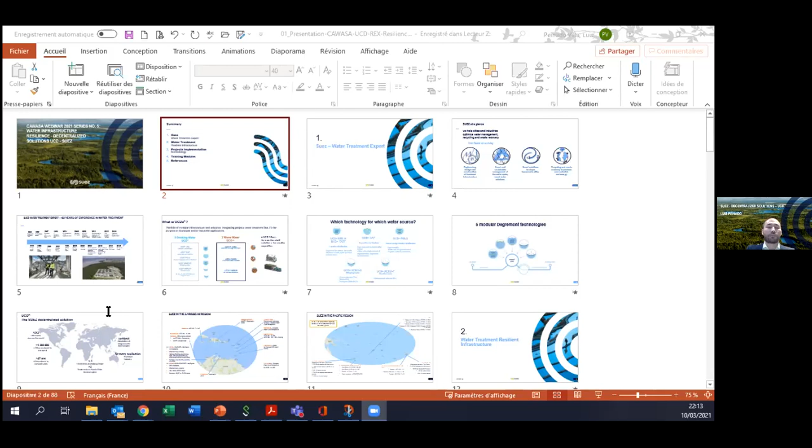And we're going to be able to discuss questions, comments, and remarks from all of you at the end of the session, or even if you have comments through the presentation, don't hesitate. So I won't get too long through these, I'm just going to put it in presentation mode.

Our four main activities: the first is Degremont, where we're very well known worldwide. We engineer, design, and construct water infrastructure and waste infrastructure as well. Our second pillar is the management of resources, water and waste, so we are operators as well as contractors for water infrastructure. The third pillar is smart solutions, mainly everything to do with digital technologies that have been shaping this sector for the last 15 years. And then we have the waste sector, especially in recycling and recovery to produce new materials and energy.

So we're going to be discussing this evening our business line, which is Decentralized Solutions, a branch of the engineering and construction activity.

Next, this timeline shows first this branch, Degremont, which became in 2015 a unique name, Suez, as all the branches of the group became Suez. Degremont is very well known; I think many of us and many water professionals have learned many processes through Degremont's Memento, very well known worldwide. This timeline shows just one of the main milestones in terms of water treatment references since the creation of the company up to now.

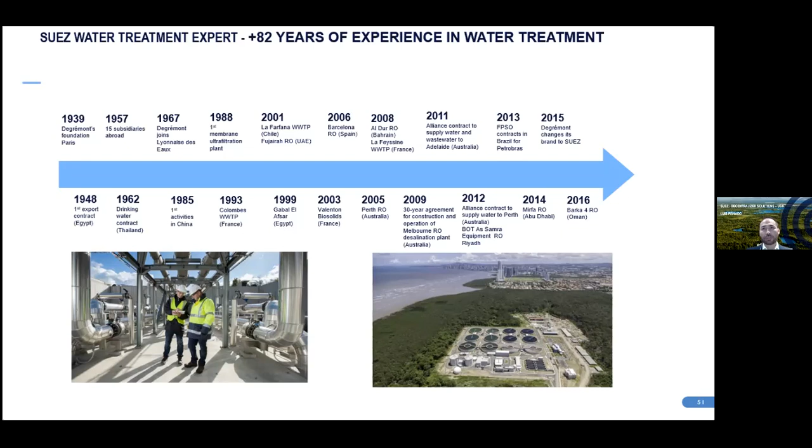And then right now we're in a different way, which is how can we get quality water and services to the rural and peri-urban areas. That's the difficult part of our sector.

From this treatment line, what we've been doing in this service for the last 27 years is taking those treatment lines and putting them into modular systems that allow cities and municipalities to deliver essential services, not only in terms of quantity but in quality as well, delivering water quality and wastewater treatment 24/7.

We have 5 different water treatment technologies. I won't get through all of them. The first, which we have most deployed, is lamellar clarification, and that's the one we're going to discuss a little bit later. Then we have 3 wastewater technologies that we see in the center - it's not the topic of this webinar. And then we have small technologies that are a hybrid from the drinking water technologies, much more compact and simpler to deploy.

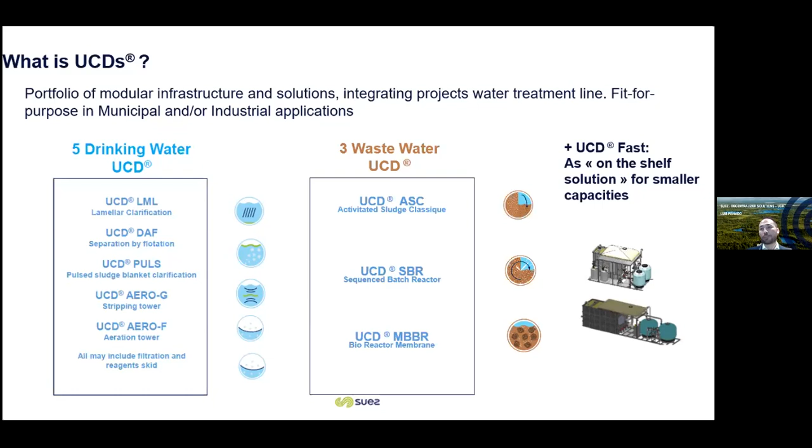So we're going to concentrate on the first one, the lamellar clarification, which is one of the technologies that many of you have deployed in your territories - operating flocculation, coagulation, settling, and filtration. That's the reason why we're going to discuss this one.

Then we have DAF, which is separation, but this time by flotation. Instead of settling, we're going to have a flotation stage, and then we're going to filtrate. But once again, it's not the topic of this webinar.

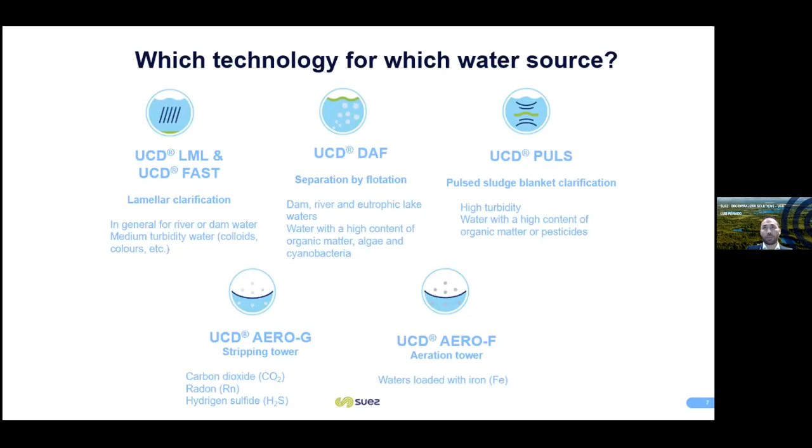And then we have pulsation and underground water treatment lines that we could discuss at the end of the webinar if you would like to.

As I was saying, the main complexity as operators is: we collect raw water, we treat it, and then we distribute it to our clients. But what about those communities that are out of reach of the network? So our model is to think in the easiest, most competitive way to install that capacity as a decentralized solution.

We're taking conventional treatment lines to the reach of those populations with networks that can be between 15 to 50 or 60 kilometers. So we're talking about mini grids to allow these populations to have access to water and wastewater services.

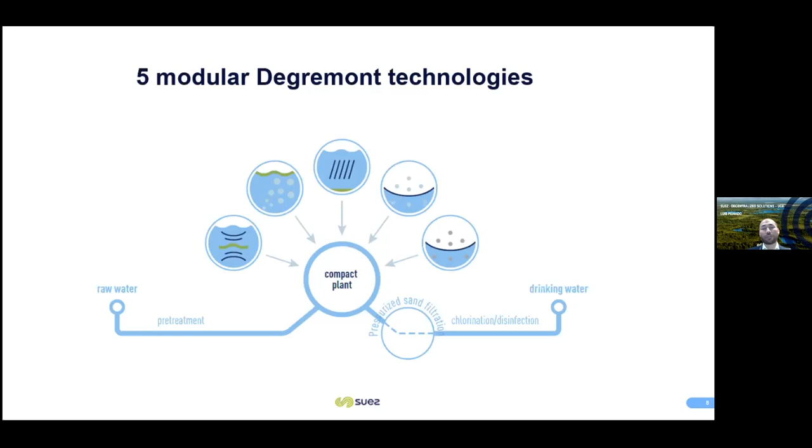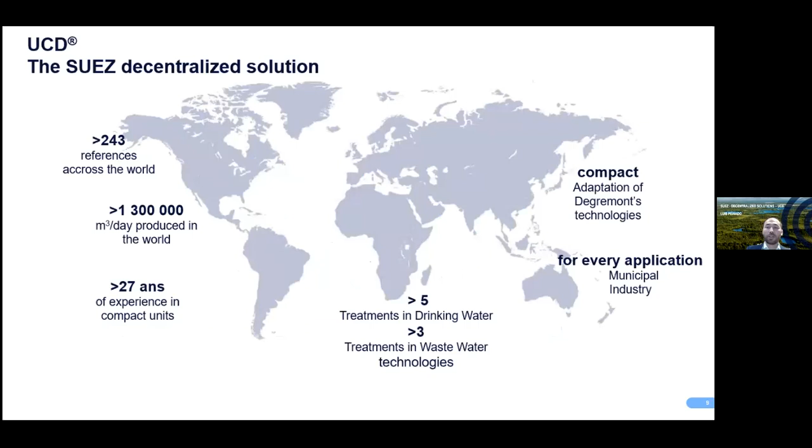In terms of references, as I was saying, we have more than 240 references around the world. In installed capacity, we produce across all our references more than 1,300,000 cubic meters per day. And we have applications, as I was saying, in municipal and industry sectors.

In the Caribbean, we're very present historically. I won't get through all of them, but one of the main points is to point out that we understand your work, because we can be operators ourselves, for example in Colombia, in two cities - like Cartagena, which is a city of 1 million inhabitants. We've been present since '95, and we've improved the key performance indicators, as you can see on the slide.

And there's another city since 2012 that we've been working with in the west part of Colombia, improving as well the key indicators of the service. And then we have other operators like Martinique, Guadeloupe, and French Guiana - because of French origins, it's a reachable market for our company.

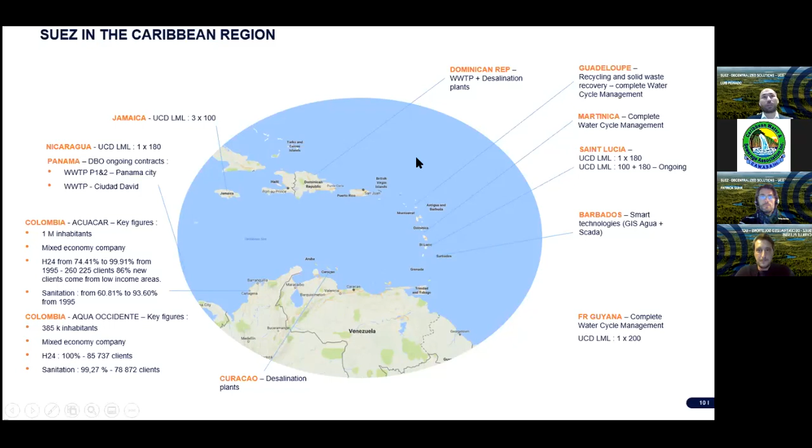And then we have other references all around the world. Right now, we're very active in Panama with important infrastructure contracts. The rest, where you see UCDs, are decentralized infrastructure that we've been deploying over the last 10, 15 years - and some references in desalination.

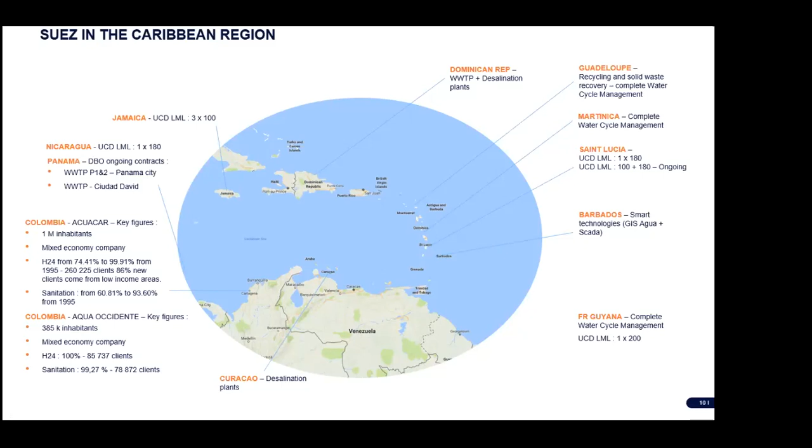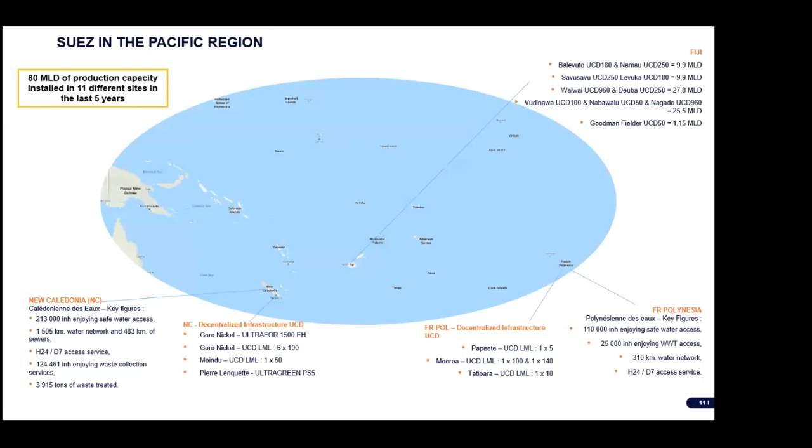This is not an extensive map, but you can see that we cover almost all the geographies in the Caribbean. And then in the Pacific it's a much bigger area in terms of insularity, let's say, from Papua New Guinea up to French Polynesia - taking into account our activities in Australia and New Zealand. We're very present in New Caledonia, where we're operators as well as in French Polynesia.

Our operators use our technology. So you can see in New Caledonia we have different references for industrial clients, for example Goro Nickel and others. In French Polynesia, they're much more municipal references.

And then in Fiji, which is quite a successful story for the national operator and us, we've been deploying more than 80 MLD in the last 5 years across 11 different sites that you can see on the right, and we still have projects ongoing.

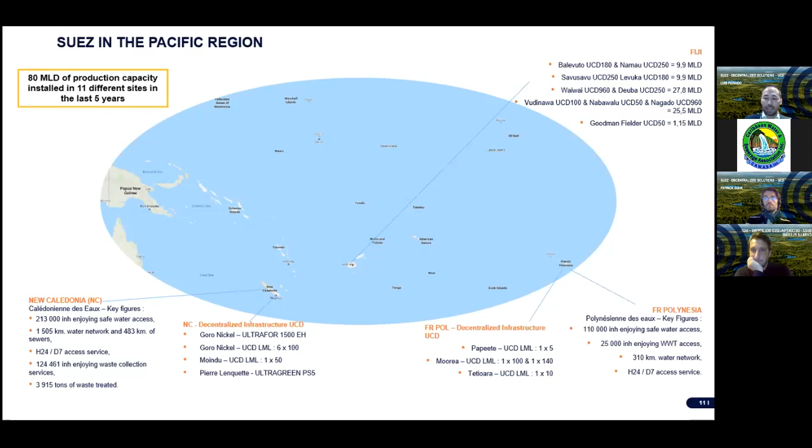So what I'm going to share right now, we're going to begin with this water treatment resilient infrastructure. It's a short video - if you have any issue with the sound, just let me know. I'm just going to put it here.

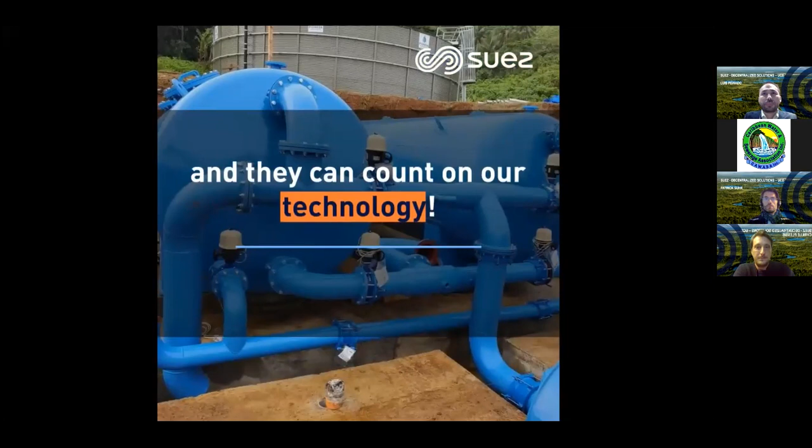Being the strongest, we've seen that the infrastructure, especially the portal frame housing and the treatment plant itself, withstands a Category 5 tropical cyclone.

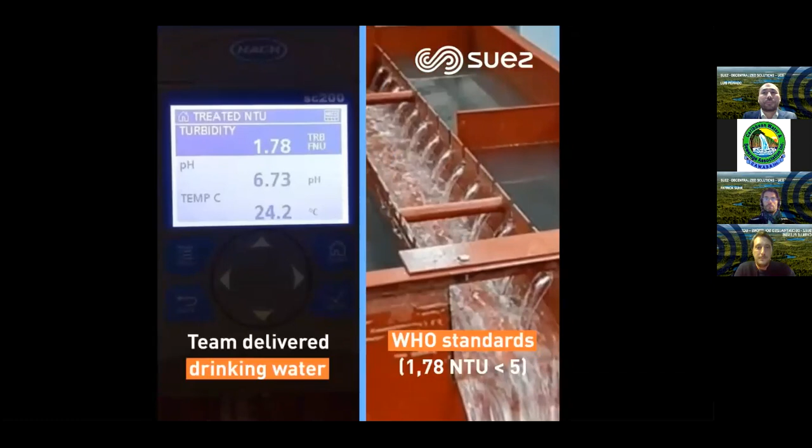To produce drinking water which is in compliance with the Fiji National Drinking Water Quality Standards for both of the package plants, Deuba and Namau.

So Patrick, the ground is yours. Thank you, Luis. So we're going through some slides where I'm going to present you on which basis we are doing water treatment on our package plants.

So the treatment is a conventional and robust conventional treatment, which is based on coagulation and then flocculation in a tank with mixer, and there is a pH corrector.

Luis, we have, yes. So once we have the right flocculation for the suspended solid, we are able to carry it into a lamellar settling tank.

After that, it's possible to readjust the pH before going through sand filters in order to get a very low turbidity for treated water before water is disinfected, before water supply to the population.

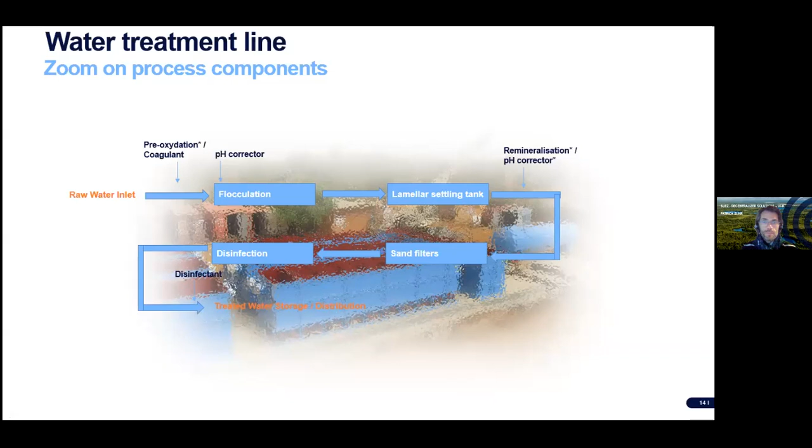Okay, next, Luis, if you can go. Yes, so here one important thing is reagent injection. In our standard, we are giving to our client all tools necessary to do this treatment and this reagent injection, which are prepared in tanks where some mixers make possible the preparation of a reagent solution.

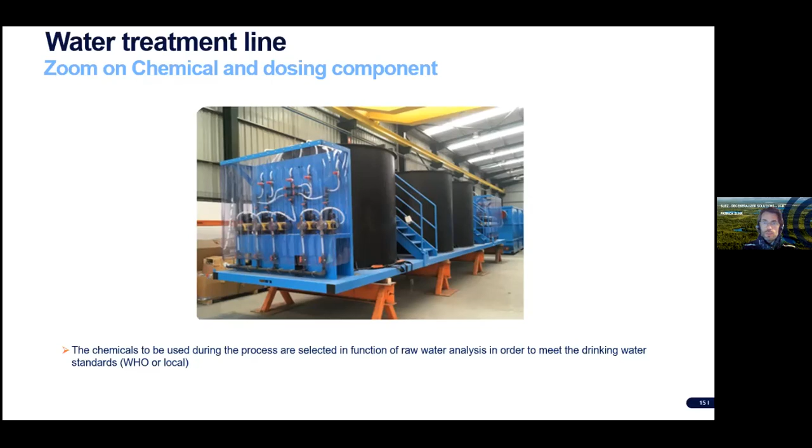So once you get the solution, the reagent is injected at the right flow rate thanks to metering pumps. You can see on the picture. Okay, thanks to that, we can reach the international standard for water quality.

So here, a small focus on the flocculation, which is taking place in tanks, as I told you, with mixers. So once coagulant and lime is added in order to get the right coagulation and the right flocculation, we have there a retention time which is adapted to all types of water.

And especially there are very good results on tropical water, which we can find in your areas. So the retention time is in the range of 14 to 16 minutes. It's the addition of the volume V1, V2, and V3 you can see here.

Then after flocculation, there are some sludge pits, and some sludge extraction valves you can see at the bottom. And the water clarifying is going through the lamella you can see at the top. Okay, next, please.

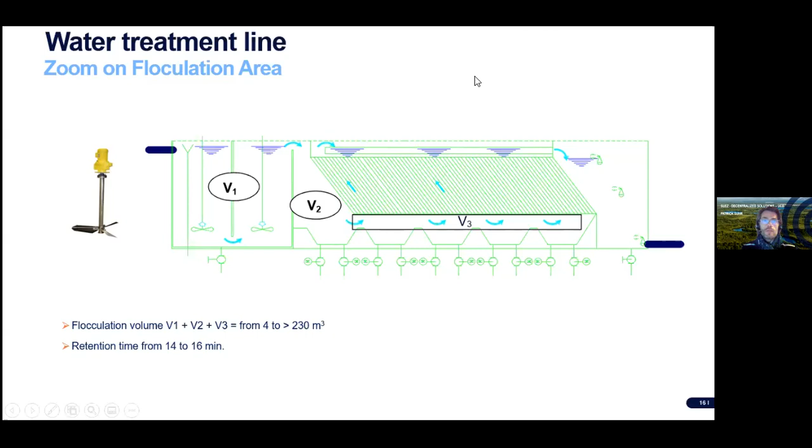So here again a small focus on some parts of our settling tanks. At the bottom, sludge extraction valve with a good diameter of 65 millimeters. So it's adapted to avoid any clogging.

On the top right, you can see some lamella modules, which are of high efficiency. And then some launders, which collect the clarified water at the top of the settling tanks with good gathering and no excess velocities.

Okay, so the figures you can see, thanks to the lamella settling, we can offer a very important settling area, because of a ratio of about 20 between the surface of the settling tanks and the surface of settling as a projected surface.

That means we have a footprint which is 20 times smaller than a clarifier without these settling modules. And thanks to that, we have a Hazen velocity of around 0.7 meter per hour, which gives very good results for clarified water quality. Thank you. Next.

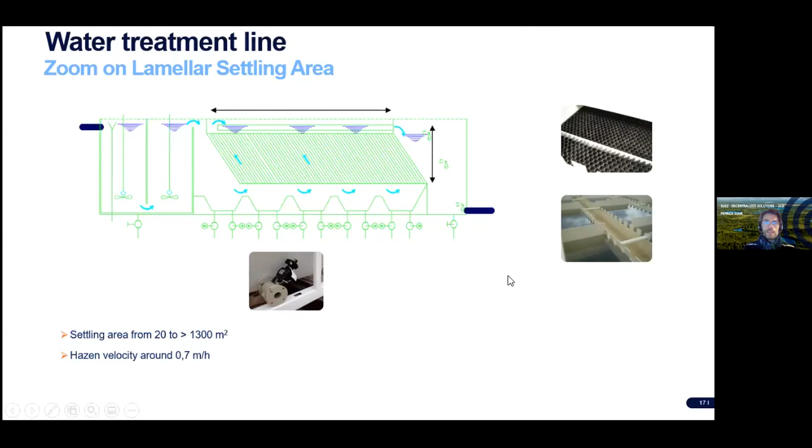Okay, so the final step of our treatment before disinfection is sand filtration, thanks to pressure sand filters. So in these filters you have a floor with nozzles, high density of nozzles, on which we put around 1 meter of sand height in order to do the final filtration.

In our standard, all filters are at least two, one filter beside the other. Why two? Because in order to be as small as possible, our package plants use some filtered water from one filter to backwash the other one. Thanks to that, you can have a very small footprint and no need of wash water reservoir or dedicated wash water pumps.

So here you can see for our compact units, we can have up to 80 square meters of filtration floor, and the average filtration velocity we can offer is between 7 and 10 meters per hour. With these figures, you get very good quality, and you can get less than 1 NTU easily on the treated water. At the bottom right, you can see the pipes, valves, and blowers which make possible the backwash of the filters one after the other.

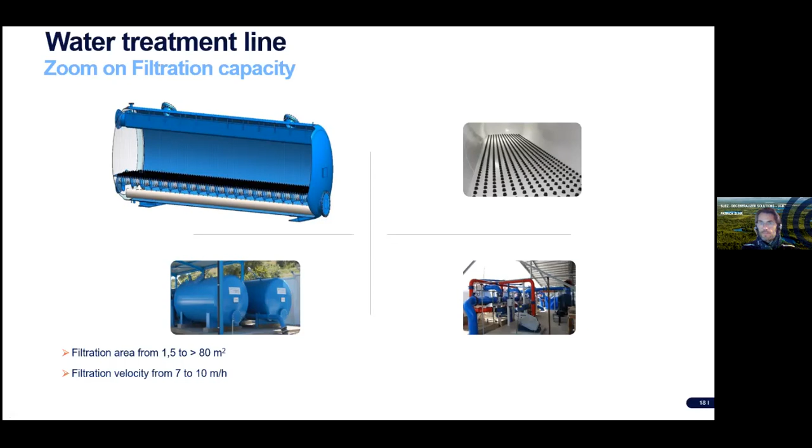Thank you, next. Here we have a quick look at what is on the HMI. That means how to manage your package plant thanks to a touch screen. So you have the main parameters, and thanks to several screens, you can go to each treatment step and make sure that the parameter and status of the plant is okay.

And here you can get some information about filter clogging, about flow rates, about the status, if this equipment is running or if there is an alarm on a special parameter. You can also have all information about the analyzer, which can give you...

At every moment you can have a look at what is the quality of inlet and outlet water. You can also choose to run in automatic mode or to do some manual operating thanks to this touchscreen.

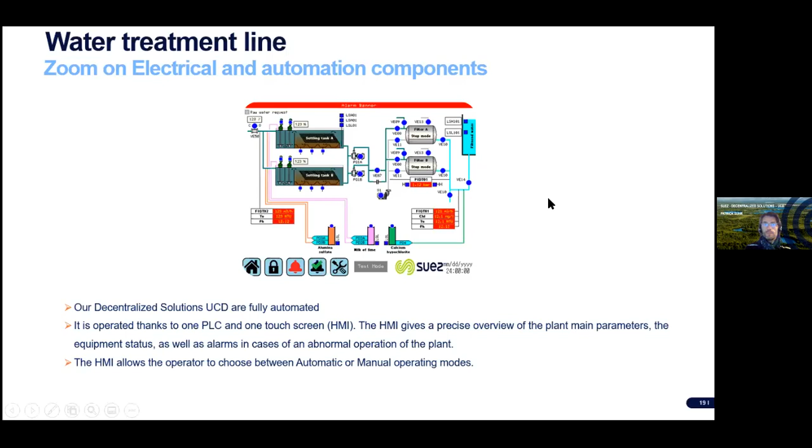So, we moved to the project's implementation. Here we are going to show you how our projects are implemented, from the day when you got an order from our client, and when we have answered a bidding from our client.

So here we have the example of a package plant we built in a very short time of less than 1 year in Bamako, which is the capital of Mali. Here you can see the result of what was implemented in less than 1 year: the treatment plant, some storage tanks, and some pumps in order to feed the network. We also had enough time to build the raw water pumping station you can see at the top of the picture.

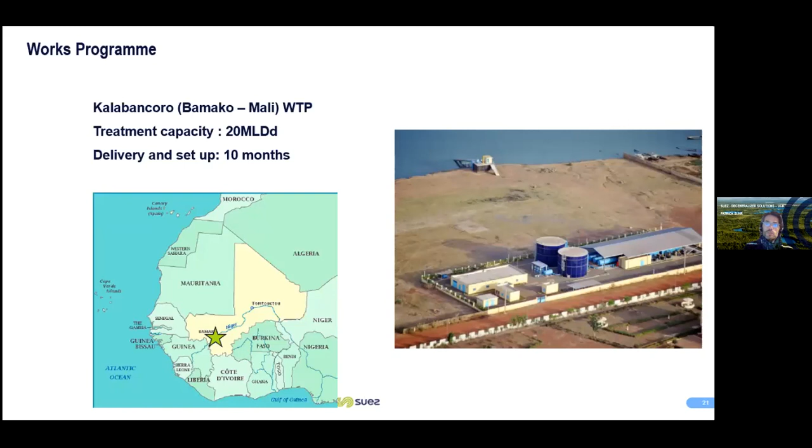So it's a very, very fast technology. And how does it work? There is a study period which takes place at the beginning of the contract.

During this study period, we do all that's necessary to manufacture the plant adapted to the client's needs, and we also study the civil works drawings so the client is able to do the civil works.

During the manufacturing period, which lasts about 4 months, thanks to a network of boilermakers located in Europe, some in France, some in Portugal, some in Greece, we are able within 4 months to build all the steel tanks, all the steel filters, and the pipings, which will be erected in a third phase.

So before erection, there is transportation. All our tanks and filters are designed to be shipped by container. You can see some pictures where the tank is well designed to fit inside the container. Once in the container, after one month for example, they are shipped by sea freight to the final destination, where they can be handled through crane.

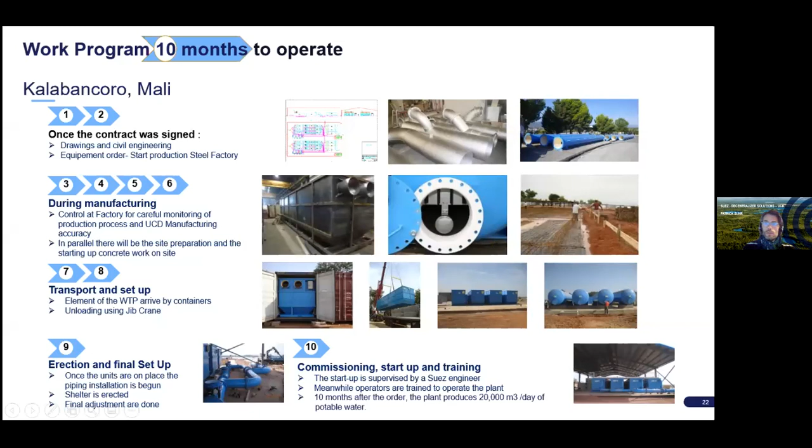Here you can see some pictures now of what is happening on site. The client is doing the concrete civil work. You can see the concrete slab with some gutters dedicated to the sludge collection and to the wash water collection, and also the drainage.

What is also done is the electrical cables are distributed within this concrete slab, thanks to electrical sheaths.

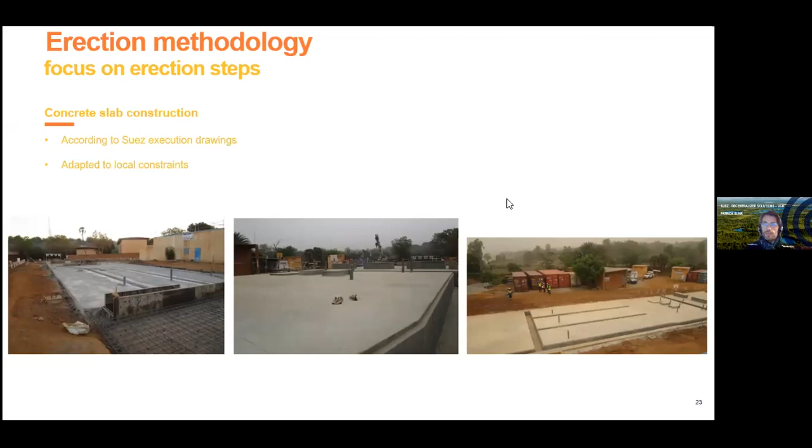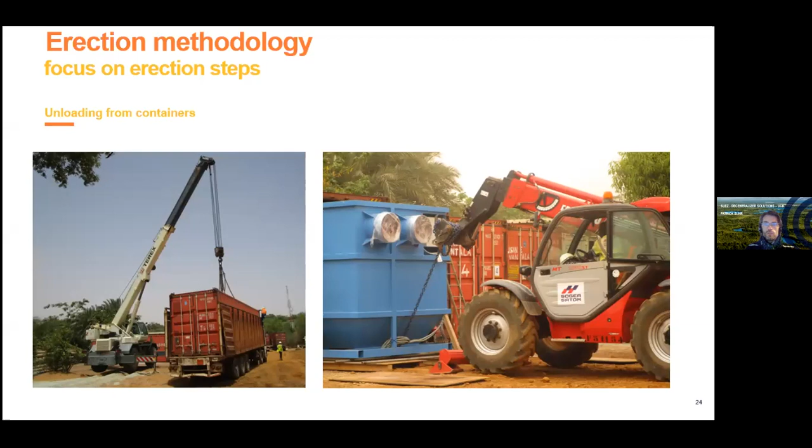Here you can see several steps of erection. So very few people are necessary.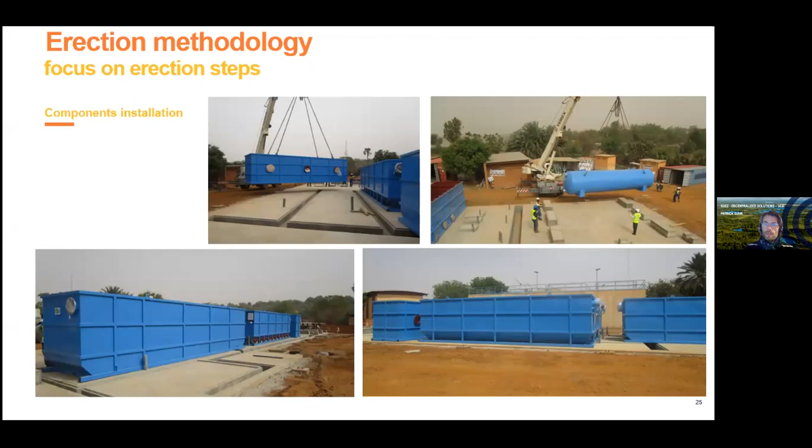Here for piping, the work is done by workers with some light handling tools, and these pipes are all connected thanks to the flanges, bolts, and supports we supply - everything necessary to do the connection and have a complete treatment plant.

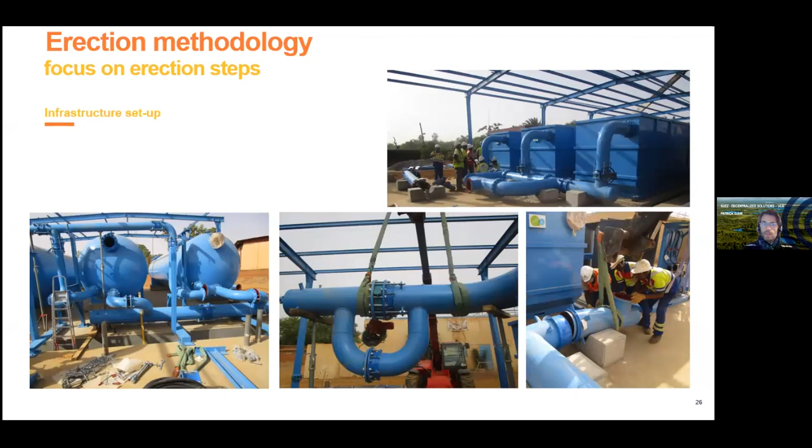And that's all. At the end, the client erects a roof, usually above the package plant, and that gives very good conditions for operators to operate our plants, and for our plants to last a very long time - that means decades, tens of years.

Maybe a last detail: in order to resist tropical conditions with high humidity, all our motors are designed for these tropical conditions, and are equipped with anti-condensation heaters and everything necessary to work in these severe conditions. Thanks to that, we have very good feedback and very few breakdowns because it is protected from these severe conditions.

Good. Thanks, Patrick. So now moving to the training modules.

All our installations and solutions are delivered with their own customized O&M manuals. You can see some on the screen that provide how the water treatment plants are or need to be operated. Normally we also bring at least some technical assistance remotely, depending on the contractual form that's been agreed. Just to let you know, we have all those documents complete with every solution.

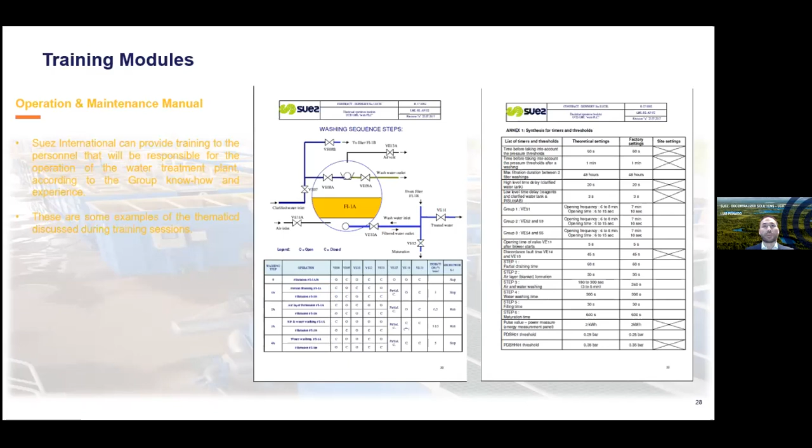And then we developed, a couple of years ago, some training on demand with 4 modules. The first one is the fundamentals of water treatment, because many operators sometimes don't have internal training. We developed this for an operator who is actually an industrial but has his own team operating the water treatment capacity, and asked us to improve the operators' and technicians' skills on water treatment.

So we prepared these modules. The second one is the principle of water treatment - water chemistry, types of pumping, and the water treatment line that Patrick just detailed.

Then the fundamentals of operation and maintenance - different equipment, protection equipment, different types of risks, chemicals, electrical, mechanical, etc. And the last one, O&M of water treatment plants, covers different preconizations for pumpings, processes, automation, alarms, and water analysis.

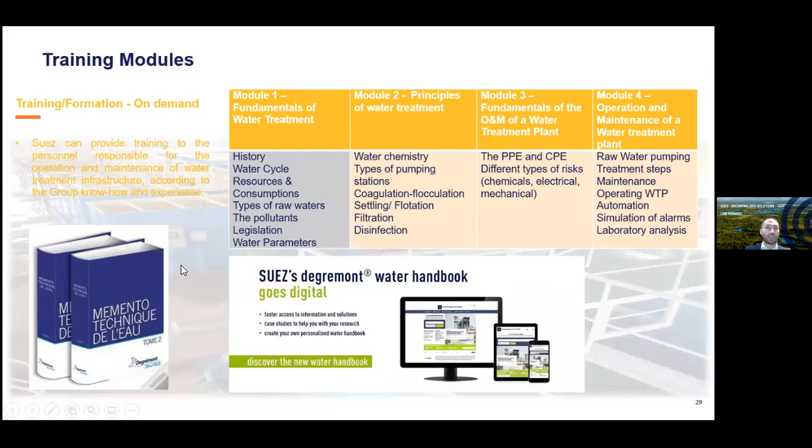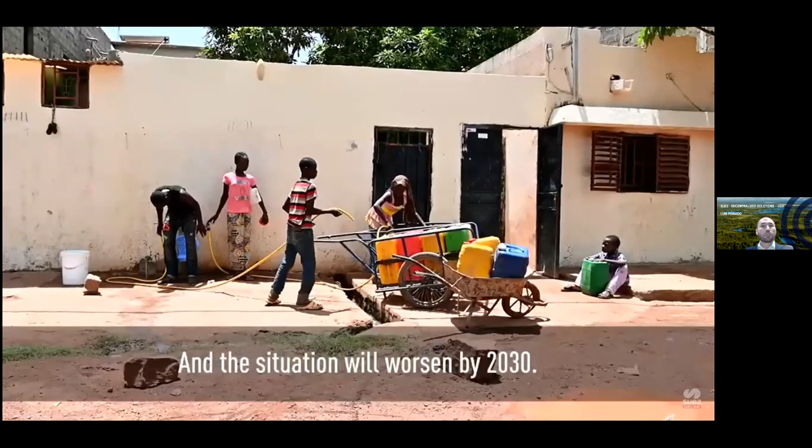Today, 2.1 billion people still do not have access to safe drinking water, and the situation will worsen by 2030. There will be 8.5 billion people on Earth, and the consequences of global warming will multiply and lead to water stress, water shortages, and extreme natural events.

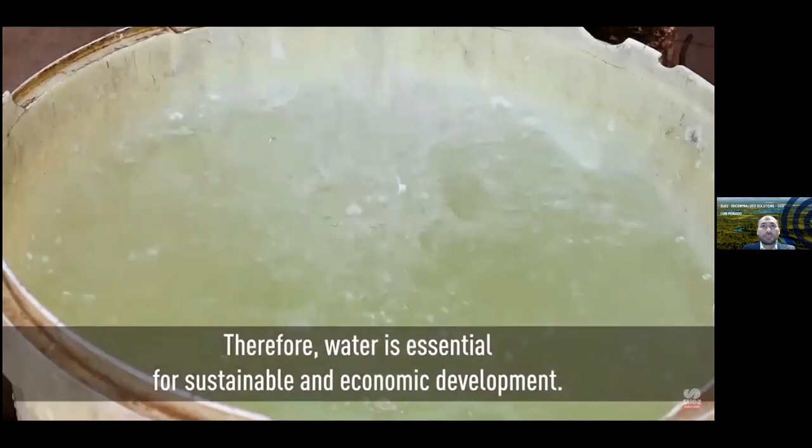Water is essential for sustainable and economic development. Without water and sanitation, people face nutrition, hygiene, and health issues.

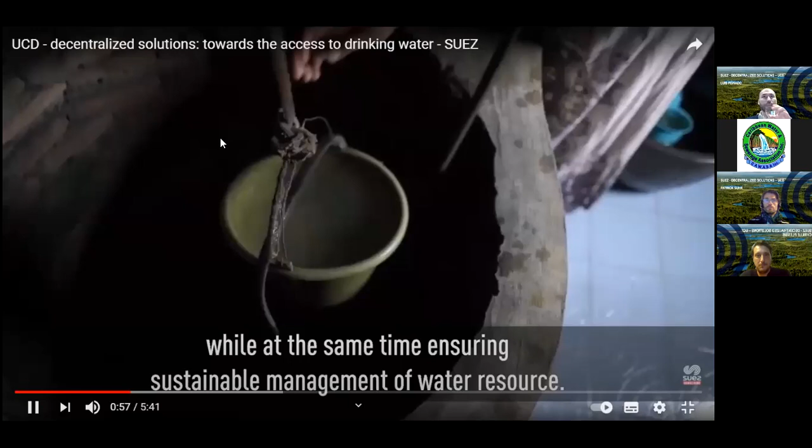One of the United Nations goals is to ensure access to water and sanitation for all by 2030, while at the same time ensuring sustainable management of water resources. Suez contributes to achieving these goals.

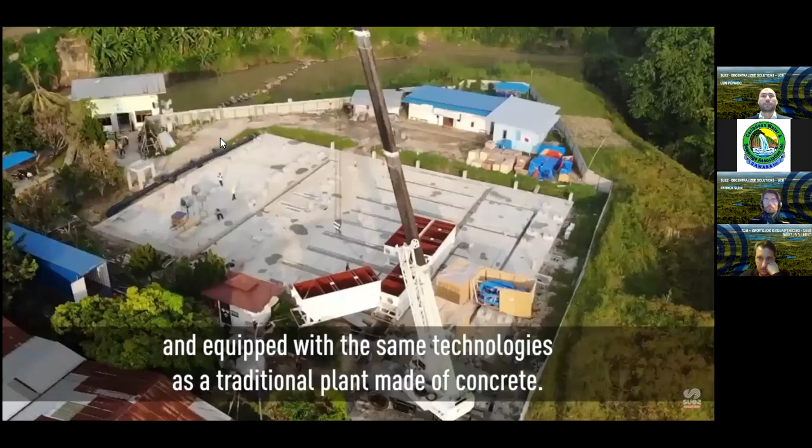The group offers decentralized solutions such as UCDs, compact drinking water production plants, prefabricated in metal containers and equipped with the same technologies as a traditional plant made of concrete. These UCDs are intended for isolated populations, megalopolis neighborhoods experiencing rapid urban growth, and in case of natural disasters.

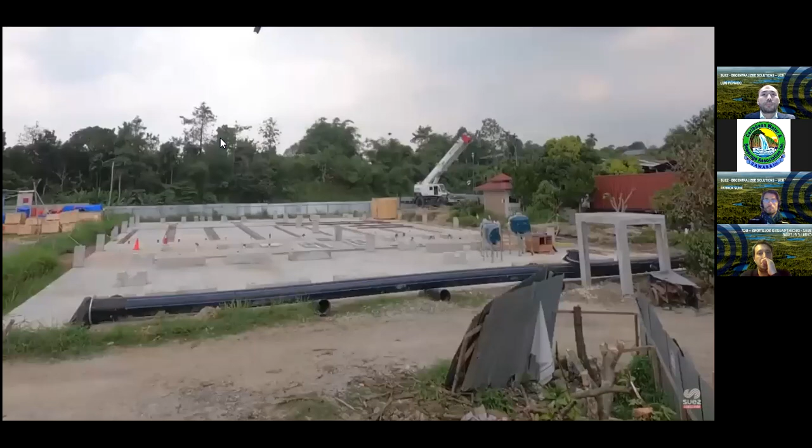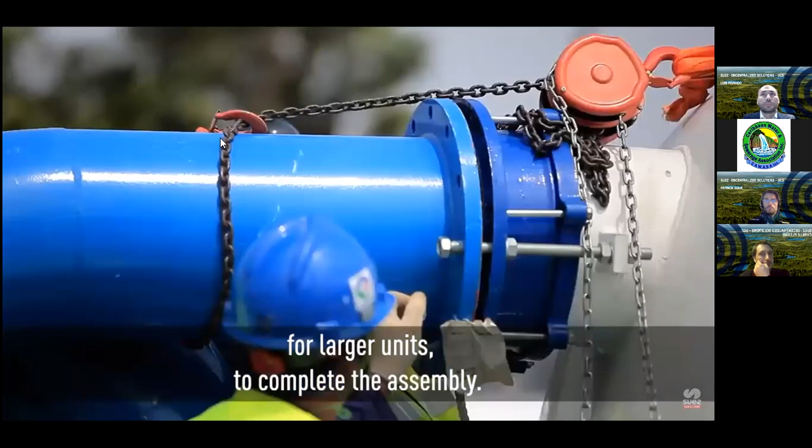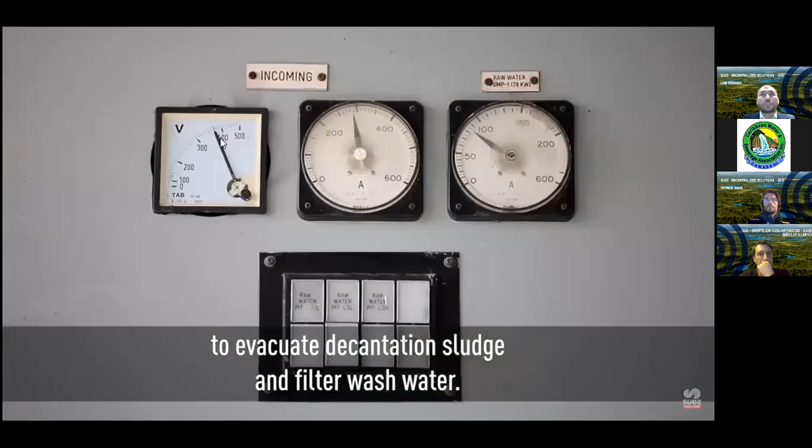The assembly of a UCD plant is much faster than for a concrete plant. It only takes a few days or a few weeks for larger units to complete the assembly. Very easy to deploy, this solution is installed on a concrete slab where a connection to the sewer is provided to evacuate decantation sludge and filter wash water.

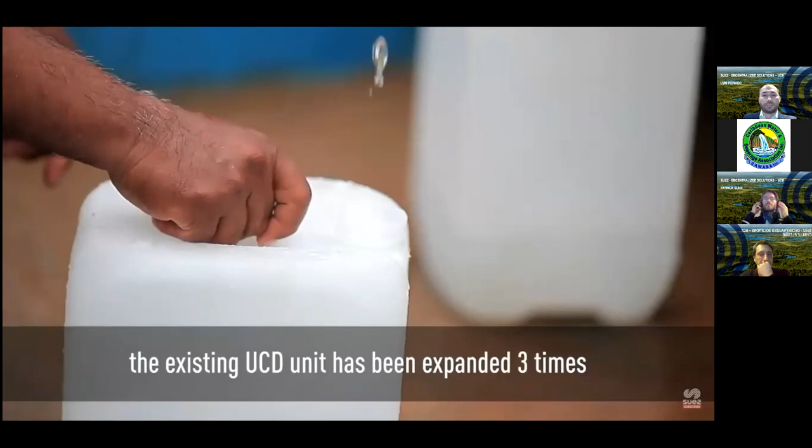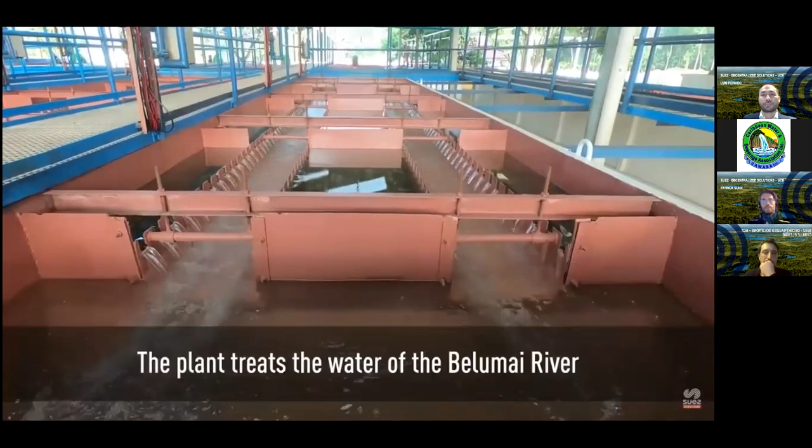In the case of Medan in Indonesia, due to the exponential growth of the city and the number of consumers, the existing UCD unit has been expanded 3 times, from an initial flow of 16 million litres per day to almost 75 million litres over a period of 15 years. The plant treats the water of the Belumai River and makes it drinkable to supply part of the 2 million inhabitants of Medan with water.

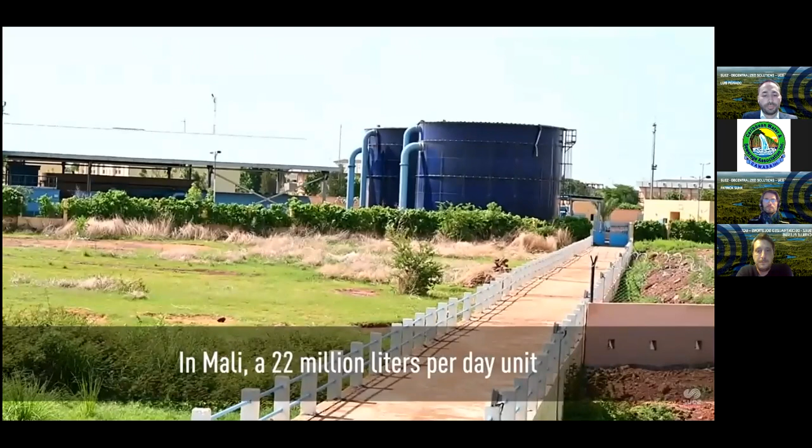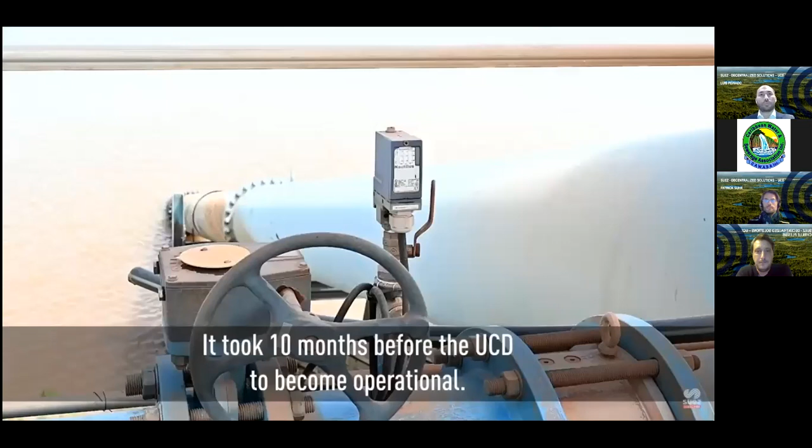In Mali, a 22 million litre per day unit has been installed to provide drinking water to the population of Bamako, while a larger plant is being built. It took 10 months before the UCD became operational. The station will continue to operate in addition to the Kalabankoro plant, which was inaugurated in June 2019.

It was difficult for us to get drinkable water. We had to wake up before dawn to get water from the well. We now have tap water and the water quality is constantly good. It's not contaminated and our life is getting much better. It's only the beginning and we are really, really happy.

For example, in St. Lucia, the Dennery district has been equipped with a UCD station since 2017, and the authorities recently decided to install an additional unit to supply more people with water.

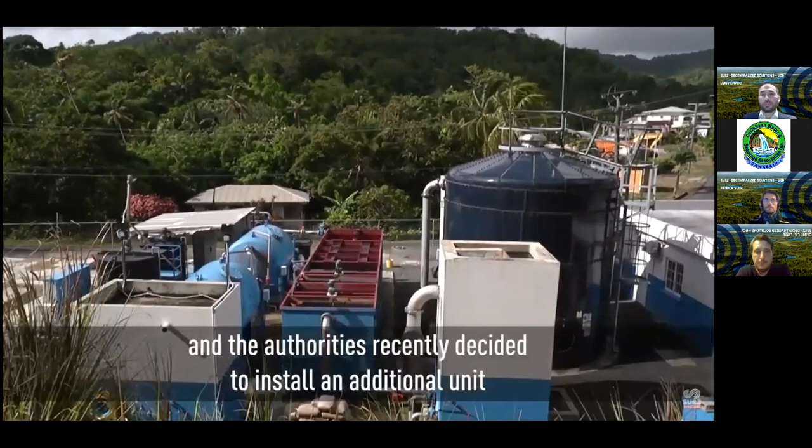Our school has benefited from the rainwater. However, even during the dry season, the tanks would be empty, and there were times when we had to send students home because we had no water. From the time that plant was commissioned, we've not gone one day without water. There is full supply daily, and we are able to keep the students in.

Well, this water project is really a dream come true, to have this centralized facility. It really is beneficial in that the water is coming from one of the best sources in the country.

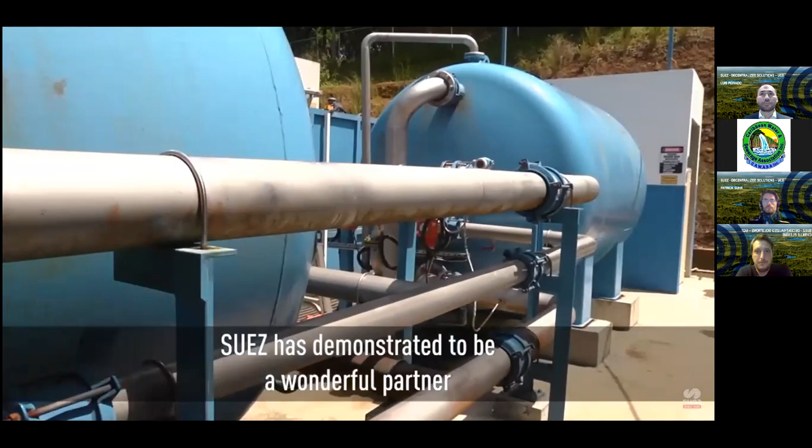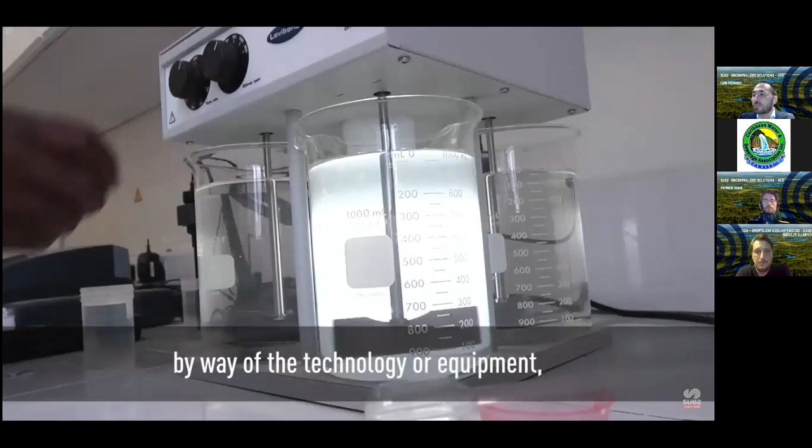Suez has demonstrated to be a wonderful partner, and I really like the way in which they honor their corporate social responsibility, where it's more than just providing technology to make money, but there seems to be a vested interest in what is happening and to ensure that people benefit in a very, very, very positive way from what they would have contributed, whether it's by way of the technology or equipment, to ensuring that the water supply is reliable, the standard is not compromised.

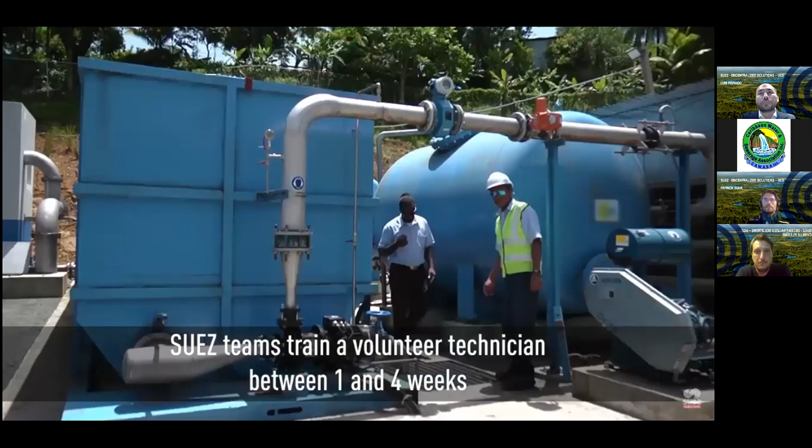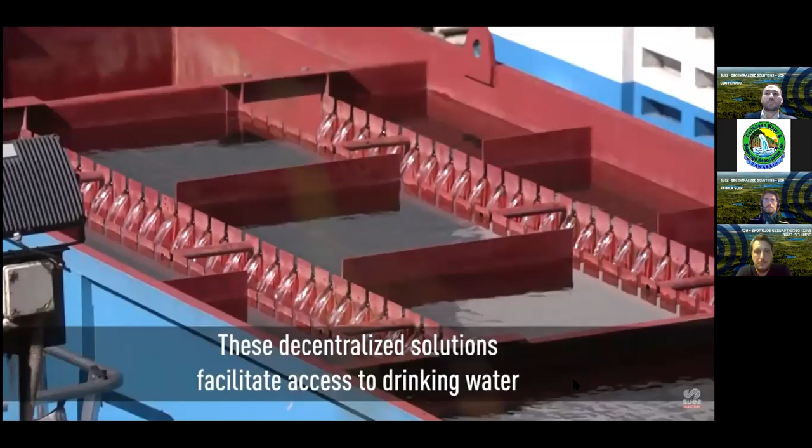The operation is then managed locally. UCD stations can be automated or semi-automated. Suez teams train a volunteer technician for between 1 and 4 weeks to ensure that the quality of drinking water meets European standards. These decentralized solutions facilitate access to drinking water for the population.

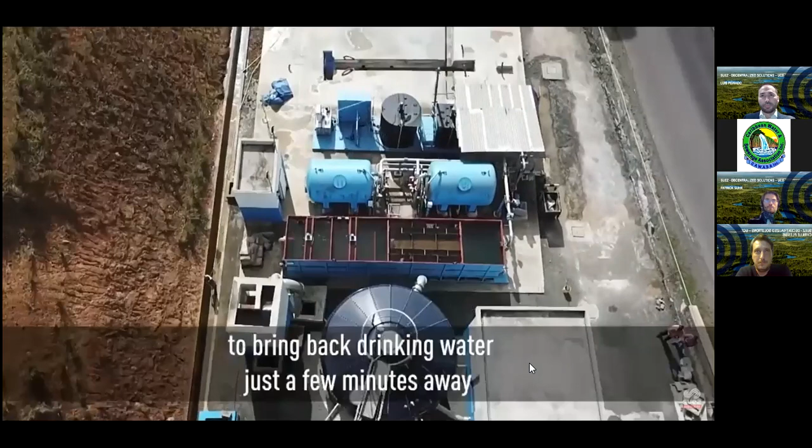Now, women and children who had to travel long distances to fetch water from the well will find it in their own neighborhood. A local water distribution system has been set up to bring drinking water just a few minutes away from their homes or businesses for hydration and cooking—a way for Suez to be an actor in the United Nations Millennium Goals and to guarantee the right of access to water for all.

Global warming, urban population growth, scarcity of resources, and digital transformation. Suez is committed.

Luis, we don't hear you.

I think that you recognize maybe some of your colleagues, some personalities, acquaintances from St. Lucia for the last part of the video.

So we reached the end. I'm putting the questions on the screen. Ignatius, if you would like to moderate them. Yeah, I can do that, sure. We have had a few questions, so let me get to the first one.

Is there a maximum influent turbidity to get less than 1 NTU? If there is, what is the maximum influent turbidity?

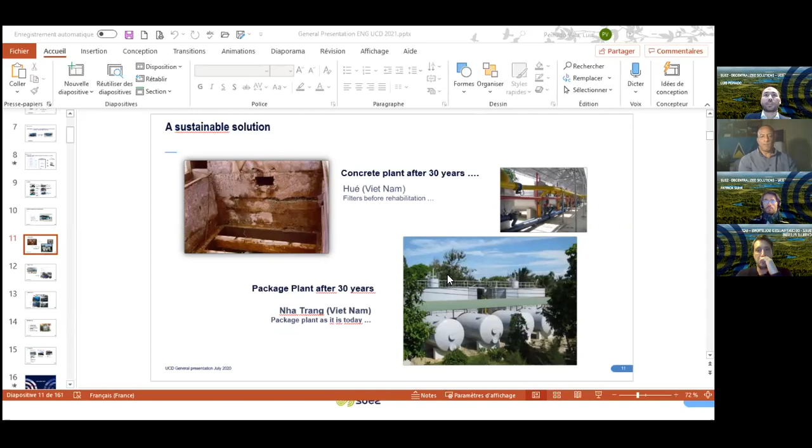We are seeing, for example, a picture on the screen where concrete was unfortunately badly maintained. This is feedback from Vietnam. And you can see on the other side a plant for more than 30 years. This is the case, for example, for another client who in '95 bought and equipped its city with a 30 MLD capacity plant, those are the pictures you see on the screen. He came back in 2015 to double the capacity. You can see the pictures, how it was operated and maintained. So from the point of view of construction, if the operation maintains the recommendations described in our manuals, there is no problem.

Then on the electromechanical equipment side, if not the spare part, you're going to have a solution from us. That's why Cyrille is with us this evening as well, he's managing that part, the spare parts or after-sales unit in our department. It's been running for many years in the company.

Just to let you know, for example, a local case: Anse La Raye in St. Lucia was built 10 years ago, and we've been approached by local teams saying we need to replace some equipment. So we need to do some expertise on how to do it in an optimized way. But you're always going to have somebody on the other side of the line, let's say, with this team of work.

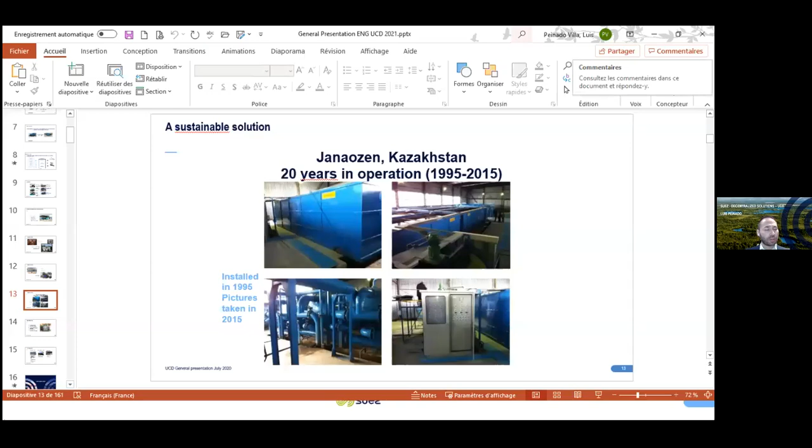What's the advantage to pass with us? There are three main advantages. The first one is the technical assistance. We've built more than 1,200 drinking water treatment plants, conventional ones, on top of the decentralized solutions. On the side of wastewater treatment plants, if my mind doesn't fail, there are more than 2,300 treatment plants. So we have a lot of know-how to tell you what's going to work better for your water treatment, your existing water treatment line.

The second point is we know some brands that are more reliable than others, and we work with a range of different brands. Through our service, we make people benefit from that knowledge at very competitive rates.

The third one is that when you're having, for example, maintenance purposes, you make your shopping list and you're buying from different parts, managing different logistics, different custom clearance, all this administrative stuff. What's very added value from us is having just one window, one contact, and you're going to have all that at once.

Your shopping list is getting quoted. If we move ahead, we're going to be delivering you the equipment, and then we're going to quickly pass it to you into the logistics, and you're just going to have one delivery. So that's quite economical when you think about all of that, if you take it and price it separately.

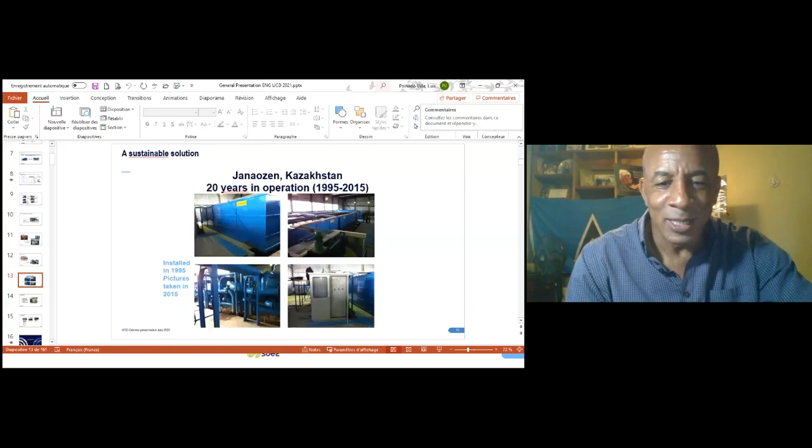And likewise, we will be able to, of course, I think Mr. Sismol from Wasco, there's a few Wasco participants, and one of them who is managing the plant down at Tomaso in Dennery North that you established. I think he's on the chat as well. So I think he would be very pleased to see that some of his work was being shown off there.